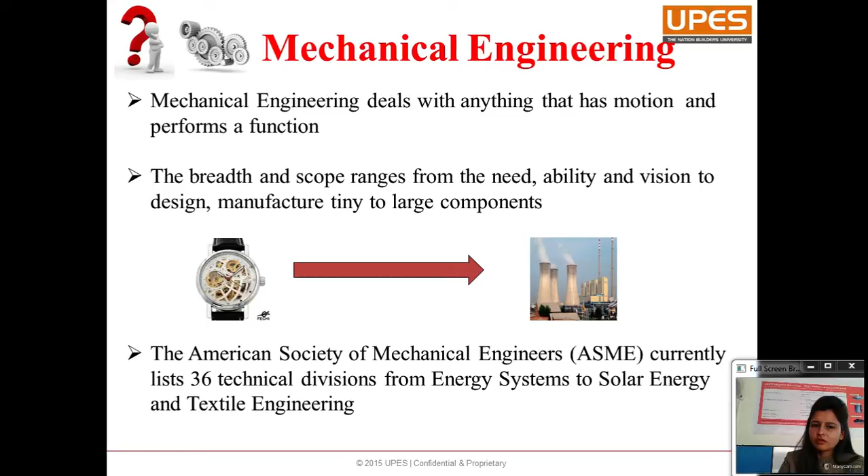Let's take some examples where our mechanical engineering is involved. If we talk about the aviation industry, you can find out thermal engineering, which is a specialization or a component of mechanical engineering, in the form of engines.

While designing these IC engines or designing the body of an aerospace industry, you need to have material knowledge, you need to have design knowledge, and when these all three domains are converted into reality, they become a manufacturing part. So all these four main domains of mechanical engineering are involved in the air industry.

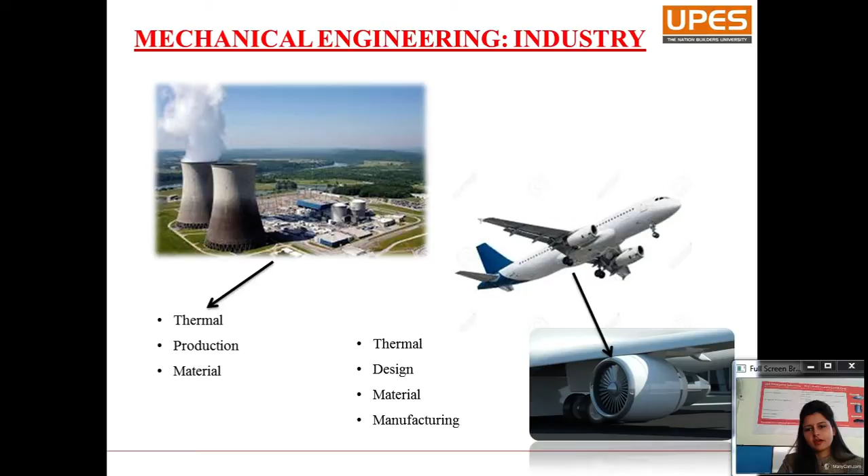Simultaneously, if you look at a power plant industry or power plant sector, there also thermal, production and materials are involved. Thermal converts chemical energy into electrical energy, production is involved here, and different materials are also involved. So to work in any industry, you need to gather the basic and core knowledge of mechanical engineering in all these four prominent areas.

After opting this branch or program, what will you study through the 4 year tenure? In semester 1 and 2, your first year, you'll gain basic science knowledge required for studying your fundamental, core, and advanced engineering.

Physics, maths, environmental studies, chemistry are required. Without basic science knowledge, you cannot go through your core, fundamental or advanced mechanical engineering subjects. So it is a must in the first year.

Then in the second year, we have some fundamental mechanical engineering subjects like fluid mechanics, where we study the behavior of fluid, mechanics of materials, where we study the behavior and properties of materials, and manufacturing technology, where we study the basic technologies used in manufacturing something.

We have machine and assembly drawing, where we learn how to design, draw, or generate a particular structure of a machine or system. We have engineering thermodynamics, where we gain basic concepts related to thermodynamics, that is heat and motion involved. Then we have applied thermal engineering, and to give you some social knowledge, certain open electives too.

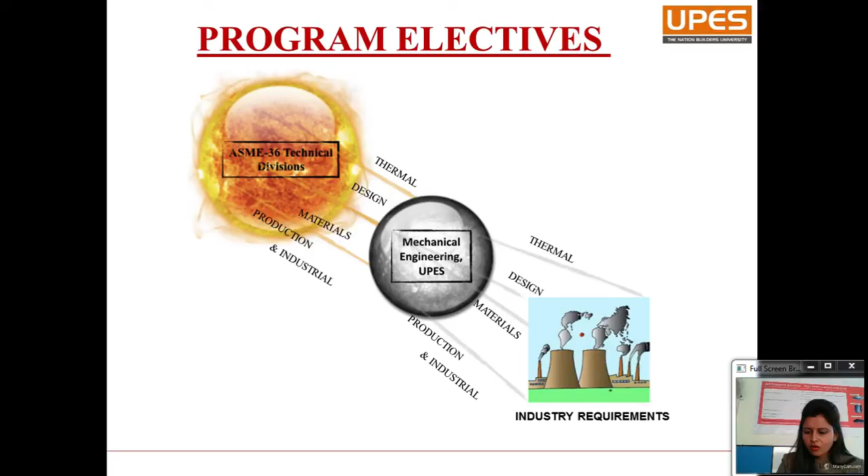What program electives do we have? We'll see now.

Then we have program elective 2, 3, 4 and 5 in 7th and 8th semester. Program elective 2 has all subjects related to your thermal domain, production and industrial engineering domain, design domain, and materials domain. And the similar thing is with program elective 3, 4, 5.

In thermal domain, we have air conditioning systems design, convective heat transfer systems, solar thermal systems, power plant engineering, steam and gas turbine, advanced IC engines. That means we are moving towards the advanced section of thermal systems: how to design them, correct them, and study the advanced technologies related to them.

In production and industrial engineering, we have industrial automation and robotics, engineering economics and financial management, production and operation management, product design development, and design for manufacturing and assembly.

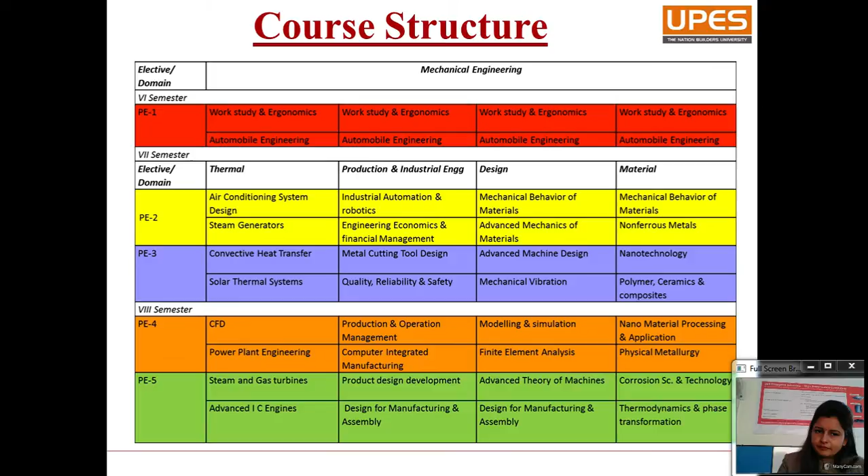Now moving from the theory part, the subject part, how you are going to apply your theoretical knowledge to the practical one. Until you have hands-on experience on whatever you have learnt in theory, your learning, your education, your degree is not complete. So in order to convert your theory portion to the practical one, to expose you to the practical environment of how industries actually work, what machines they have, how research is processed, we have a well established and skilled lab infrastructure.

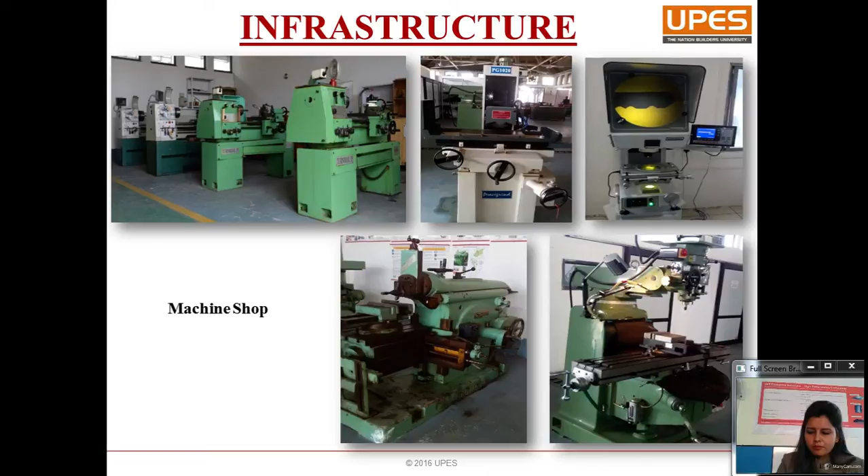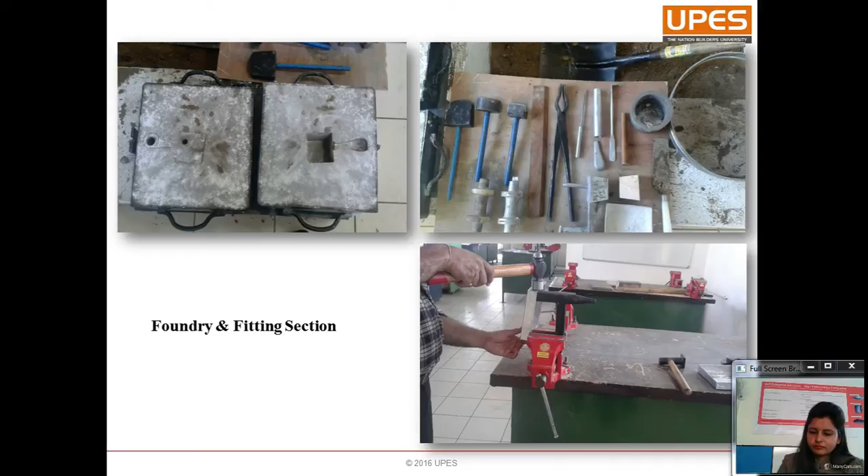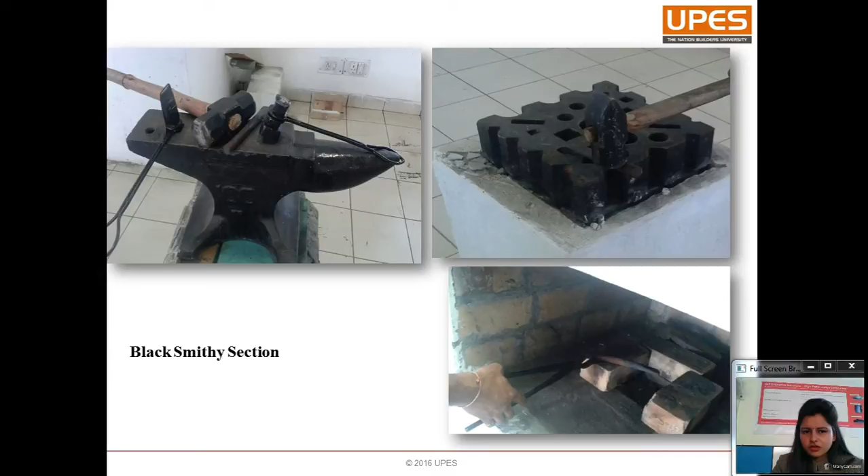This is also one of our basic sections, the blacksmithy section. We might have gone through this in our day-to-day life. In a practical environment, how these things actually happen.

Then we have our refrigeration and air conditioning lab, one of our most established labs. We have an air conditioning setup by Hilton, a refrigeration test rig, and an air conditioning test rig, in which we study the behavior of air flowing through a refrigeration or air conditioning test setup - how refrigeration happens, how temperature variation happens, how air is cooled in an AC setup, related to an AC or refrigeration system.

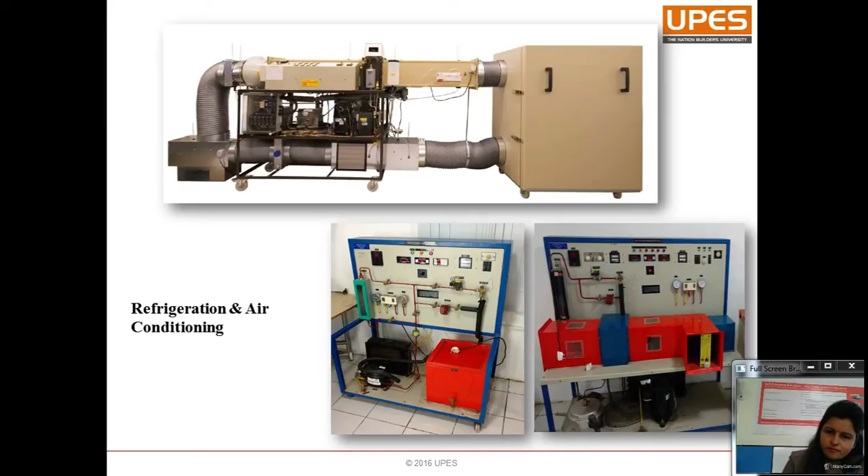Moving towards our materials and metrology lab, we have our profile projector - in the rightmost figure, an advanced machine. Then we have a 3D printer, and certain advanced materials to study material behavior.

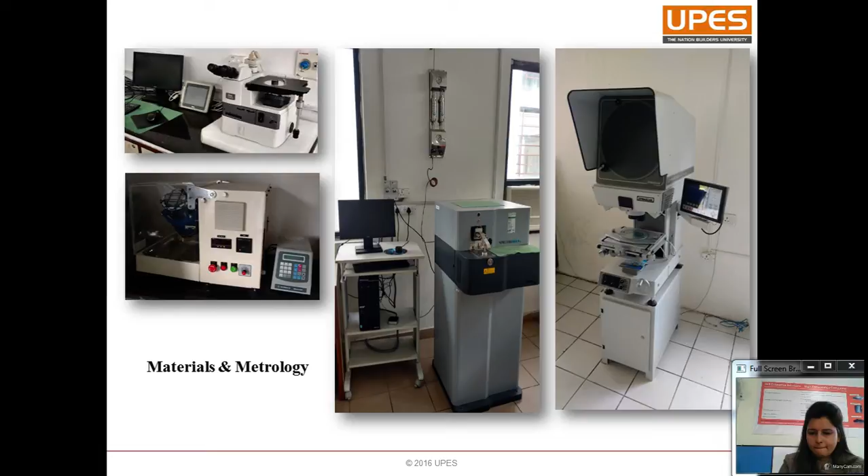As mechanical engineering also involves the automotive sector, we have an advanced and well-established automotive chassis lab, in which all parts of an automotive system can be tested, maintained, and discussed.

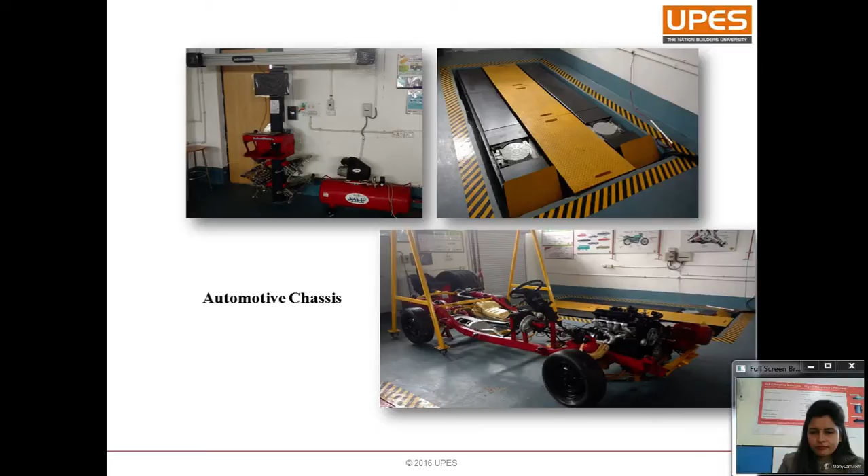Then moving ahead towards engine testing. Engine testing means when we are interested to discuss the performance characteristics and exhaust characteristics of a particular engine - how it performs, whether SI engine, diesel engine, or petrol engine, how they perform and what their exhaust characteristics are. We have all the setups to find out, improve, and test these characteristics. That happens in the engine testing lab, as we can see in this slide. We have engines in which we can test our fuel.

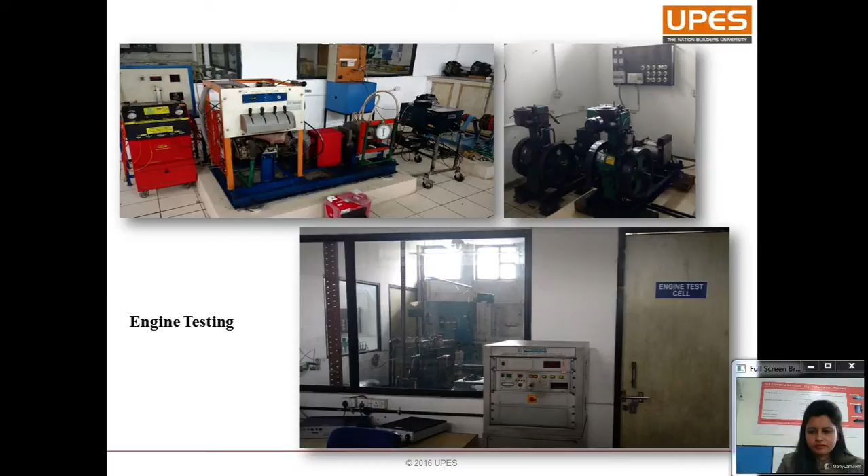Then we have one advanced machinery with us in which you can check the different mechanical properties of a particular material. This is one of the advanced machinery we have with us.

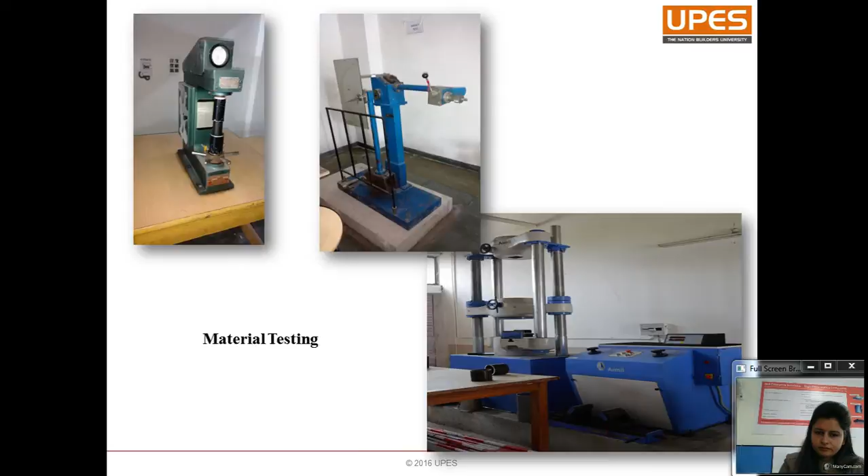Then, of course, we have a fluid mechanics and machinery lab in which we are going to gain the basic fluid concepts and whatever fluid machineries and turbo machineries we have in our system.

We have Kaplan turbine, Francis turbine, reciprocating pump setup, centrifugal pump setup. In fact, we have a MIG test setup too, in which we can go through the components involved in a particular MIG engine. We have that test section too. You can see it in the downmost figure.

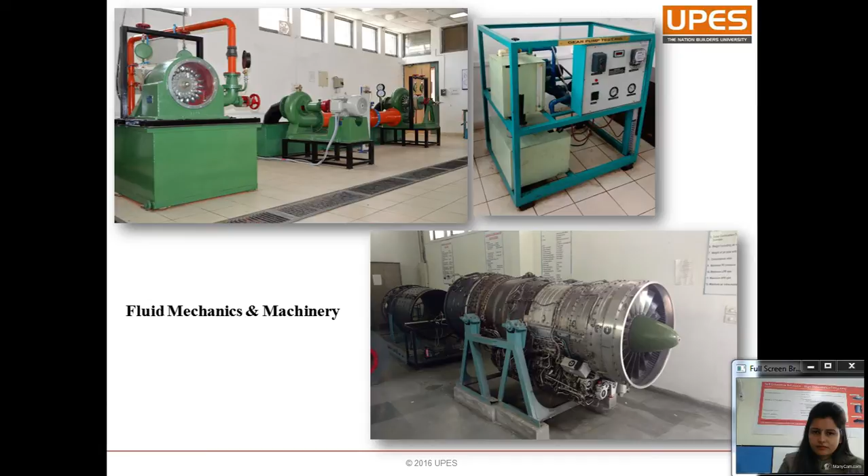Moving towards theory of machines, we are going to study the governors, the gyroscopes, the energy storage systems, and different systems involved which are there in your theory syllabus.

All setups we have in our lab. We have gyroscopes, governors, flywheels, energy storage systems, and a lot of them.

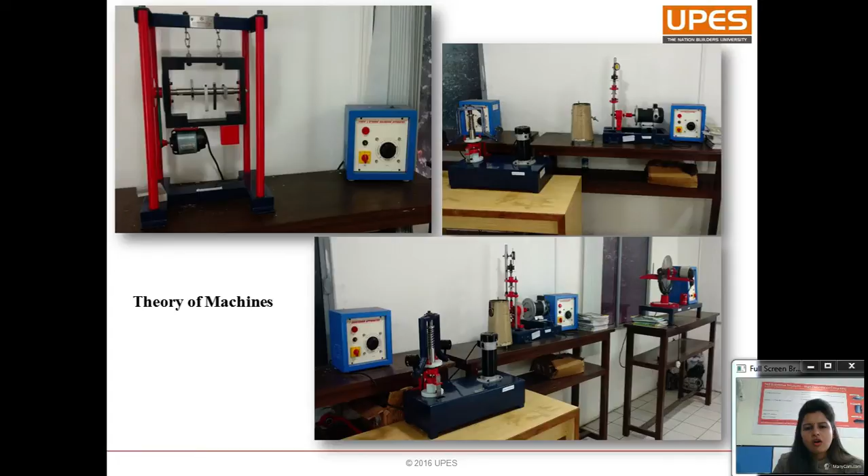One of the most advanced labs, the computer aided manufacturing lab, in which you have an automated CNC, computer numerically controlled lathe. The lathe that you studied in our earlier slide has been automated in this lab, and that setup we have in our laboratory - that is CNC. So this is one of the most advanced laboratories we have.

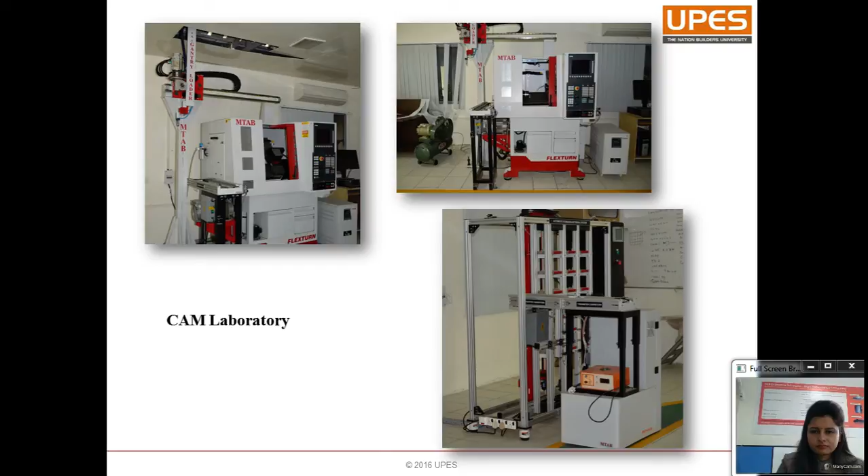Curriculum: we have engineering graphics as a subject in which we learn how to design a particular system or machine. Now, as all the design systems have been automated, we have a CAD laboratory too, computer aided design laboratory, with the most prominent softwares to design a particular machine, a particular system, and to analyze its behavior too.

Like we have Gambit, we have CATIA, we have SolidWorks, ANSYS, Fluent, and many more.

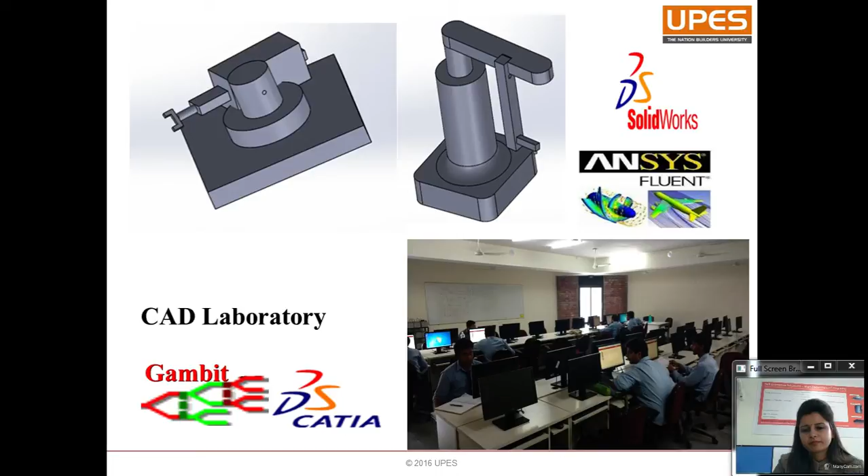As I talked about in our department slide, we have an intensive research prospectus too. This is our IC engine research lab in which various fuels have been blended and tested, where we study how a particular fuel after blending will behave, what will be its performance characteristics, what will be its exhaust characteristics, and how we are going to improve the efficiency of a particular engine by blending the fuels.

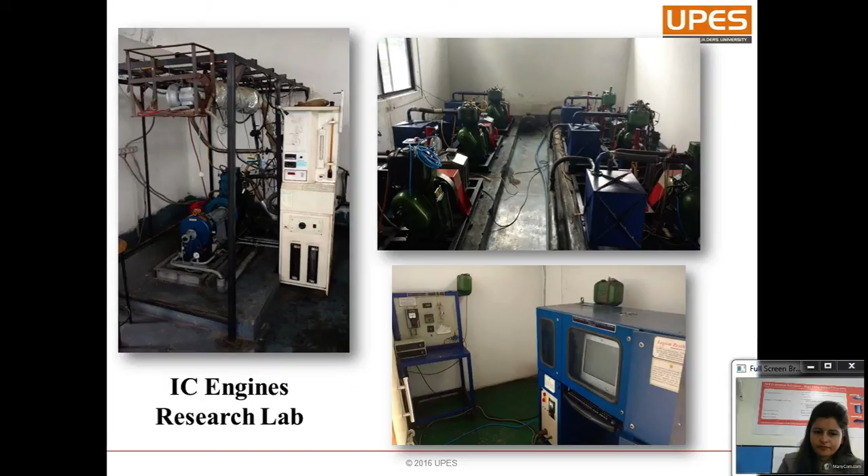Then, of course, we have a biodiesel research lab in which we blend different biodiesel systems, different fuels obtained from natural plants and converted into biodiesel, and we test it in our IC engine lab too. We have tested Jatropha, and we have tested different biodiesel fuels in our IC engine lab. So that's what our research speaks.

Bosch, our mechatronics lab, a center of excellence, in which we have a small assembly section of a huge car manufacturing industry. You can see all the operations there, whatever happens in an actual car industry or automotive industry. We have certain automotive robotic systems also there in our Bosch lab.

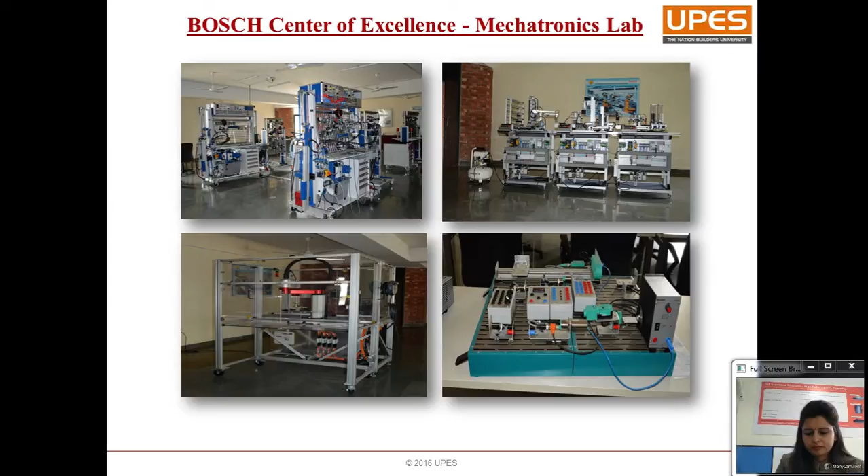Now let's talk about the student activities and student exposure - how they can enhance their technical skills, and how they are exposed to the industrial environment.

Regarding that, we have our student chapters. Different Sparkfest events have been conducted. As you can see in the pictures, various quizzes, technical competitions, robo wars, and guest lectures have been performed under this chapter.

Then we have IIM and SSPC, where a Padartham was conducted in Delhi, and our students participated there. We have international guest faculties and a lot more activities throughout the year under these chapters.

Under these chapters you get an enormous opportunity to explore yourself as a technical person, to enhance your technical capabilities, and of course you'll get industrial exposure too, to build up the industrial and academia relationships.

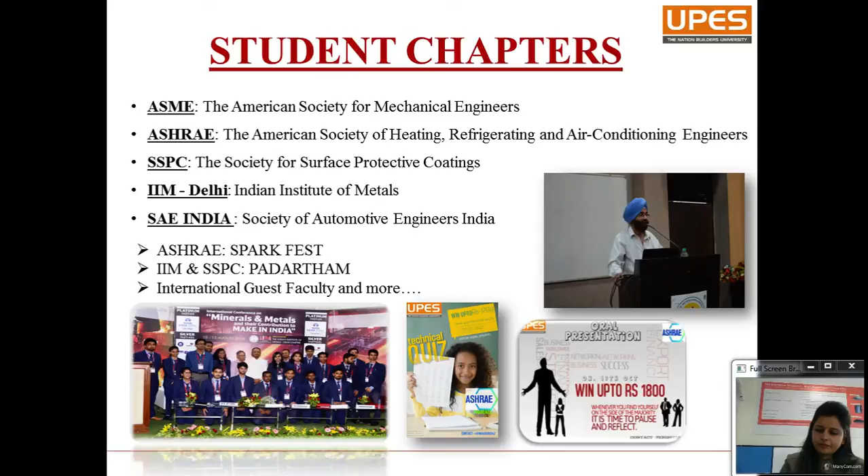Finally, why we have started this branch, why we are going through this program, what is our ultimate objective according to the students, is the recruitment process.

We have our prominent recruiters which have visited our campus this year, and the placement process is still going on. We'll be completing it by the end of May.

The most prominent company that has visited our campus is AVEVA, a British company established in Cambridge, UK, a software company that provides technical assistance and technical solutions to the marine industries, to the power plants, and a lot more.

We have Maruti, all of us know about this. We have Hyundai in our campus, we have Mahindra in our campus. Of course, we have ITC hotels in our campus.

ITC hotels are basically Indian Tobacco Company. It is a branch of ITC, Indian Tobacco Company, and it has its green campus. Green campus means a campus based on renewable energies. So they hired our students for their green campus.

Then we have Tata Projects, High Tech Robotics, MAN Trucks India, Tata Technologies, Rane Steering Systems, which deals with steering as well as sitting with safety systems. This is a little about our companies, and many more are there in the list. The list is a little, but the final list is endless.

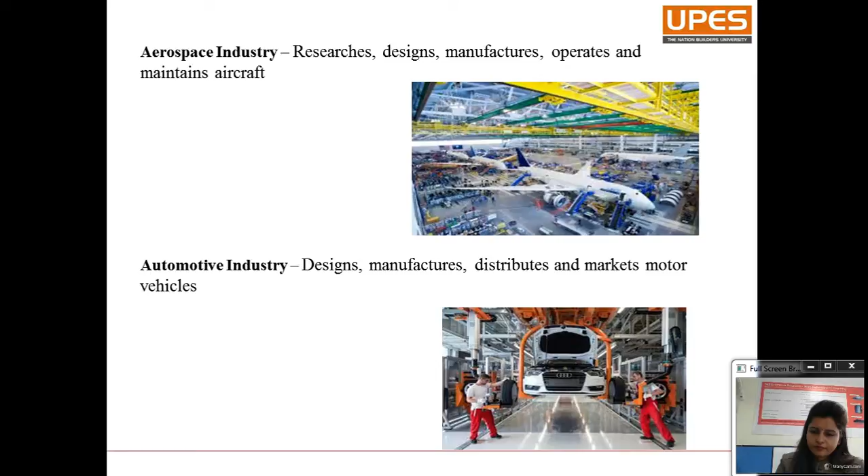You can also find your scope in chemical industries, which covers all the oil companies, chemical manufacturers, and businesses that support them. You can be involved in building a new plant or developing a new process technologies.

Moving towards the construction industries, as we have seen, Tata Projects have visited us, and it is involved in the process of placement of our mechanical students. Tata Projects is basically a construction-based company dealing with industrial construction, urban construction, and domestic construction too. So you can find your career in infrastructure, buildings, and services.

Definitely, if you have studied the AC system, refrigeration and air conditioning, you can be involved in heating and ventilation systems of a particular building.

Defense industry, of course, this is the most prominent field where you can find your career as a mechanical engineer. You can find your career in providing equipment, support, services for the armed forces and securities too. We have different defense organizations here, like DRDO, DEAL, and ordnance factories in which defense equipment is being manufactured, and mechanical engineers are definitely required there.

Then you can find your career in electronics industry too, where you can design and manufacture components, complete equipment for sectors from automotive to medicine and military.

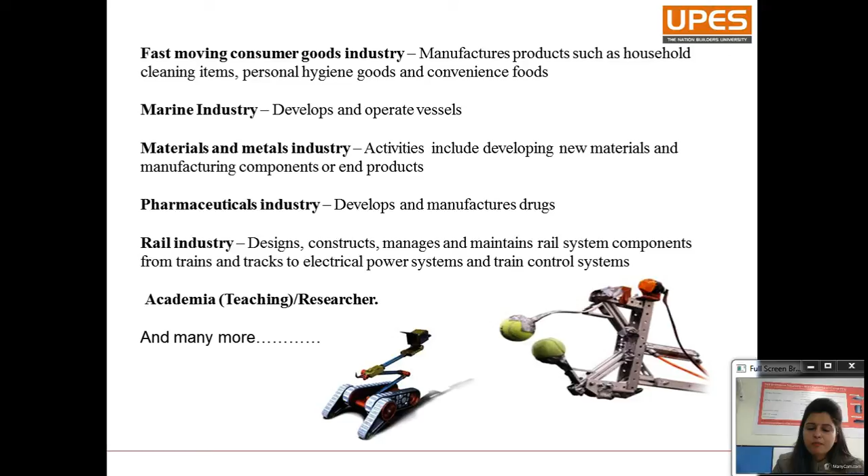That means you can build up your career in nanotechnologies, in which material properties change at the nano level. You can work on thermal fluid systems, in which heat is being stored or energy is being stored in certain thermal fluids, which change their behavior while heat is being stored within them.

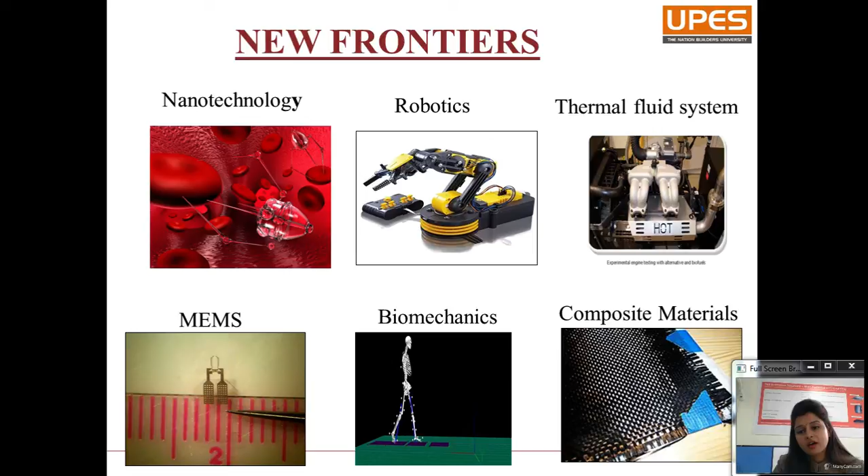After completing your graduation, then of course you can find your career in design engineering, heating specialist engineer, mechanical, mold design. If you're working in a nuclear power plant or trying for a nuclear power plant job, you can be hired as a nuclear engineer. In any industry, you can find a job as a planning engineer, power plant engineer, robotics engineer.

If you're planning to go to thermal power plants, you can be hired as a thermal power engineer, tool engineer, or if you're working on different blends of biodiesel or different blends of engines, then you can be a tribologist, and many more.

If you want to pursue your higher education, what are the specialized fields you can pursue? You can opt for mechanics, mechatronics and robotics, which is one of the prominent fields, or structural analysis. You can go for thermodynamics and thermosciences, design and drafting, friction stir welding, or micro electromechanical systems like sensors, which comes under the category of MEMS, involving electrical and mechanical parts combined at a micro level.

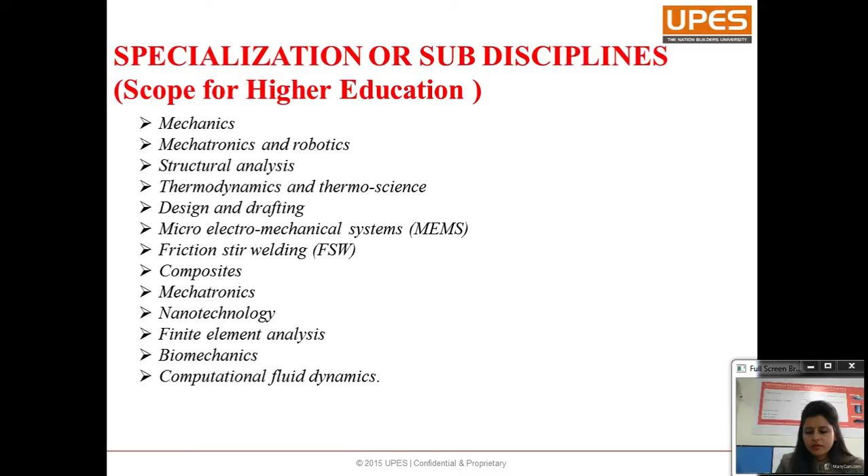You can work on composites, opt for nanotechnology, go for mechatronics, which is a combination of electronics and mechanical engineering, or work on finite element analysis, one of the most advanced fields in mechanical engineering. You can opt for biomechanics if you want to make your career in medical sciences, or go for computational fluid dynamics, where you compute the dynamics of a particular fluid using certain software.

So if you are interested in machinery, functions, robotics, material science, micro devices, weapons, design, aircraft, renewable energy systems like solar energy, wind energy, ocean energy, and their manufacturing, then mechanical engineering is the best choice to prove your ability and interest, and you can find the career you wish in this branch.

UPES has also been inclined towards the research component, to increase the enthusiasm among students regarding research. Every year we organize RISE, Research Initiative for Students of Engineering, where we ask for proposals from students and encourage them to generate a prototype, converting their ideas to reality through funding from the institution, and they are awarded every year. This is an initiative we've been working on for years to encourage students into research and increase practical knowledge apart from theory.

So come and join UPES if you want to grace your career with industry-oriented teaching, a research environment, and of course our well-equipped, specialized facilities.